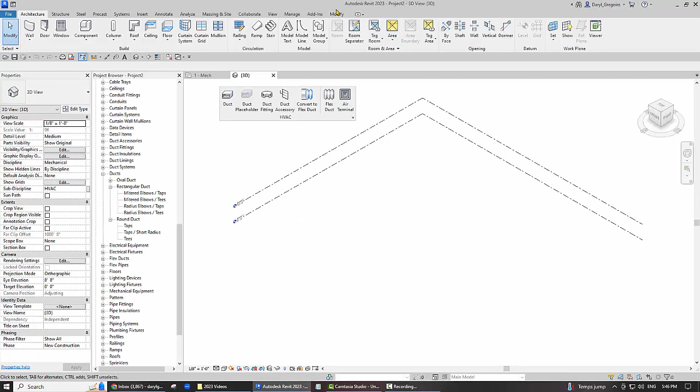I'm going to go into my 3D view, and I'm going to go up here to view, and I'm going to tile my views to split them and do a ZA for zoom all. And I'm going to draw over here. So I've pulled my HVAC palette off of my palette up here under systems. Okay, it sits up in there, so I've pulled this out.

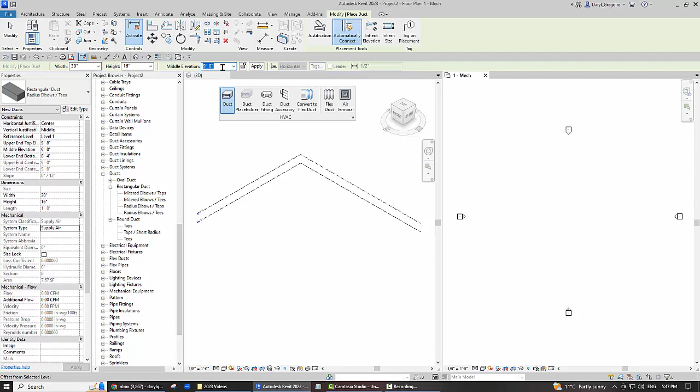So just as an example here, I'm going to start to draw some duct to have some fun, and I'm going to glance over here and take note that it's on supply air, and maybe I'm going to change the dimensions to be something like 30 by 16 or something. And then I'm going to say I'm coming off maybe a piece of equipment or something, let's say 3 feet. So I'm drawing a piece of duct here at 3 feet, zooming as I go. So off I go, and I click on there, and that color is because of the supply air.

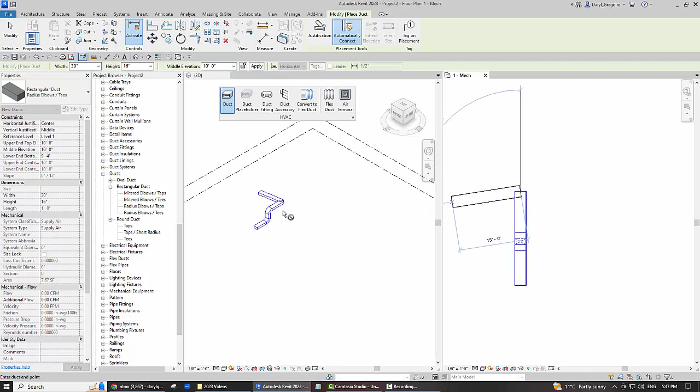And then I can switch my elevation to be 10 feet, and it's going to put my vertical riser in there with my 2 elbows. You can kind of see that over here as I draw, which is kind of neat. And then so I carry on and then turn the corner, zoom out a little bit. You can see what's going on in both windows. And I'm up at 10 feet, and then maybe I'm going to drop down to 2 feet. And then I can just type in 2 if I want, and then go to there, and then it's going to do a bit of a transition for me over here.

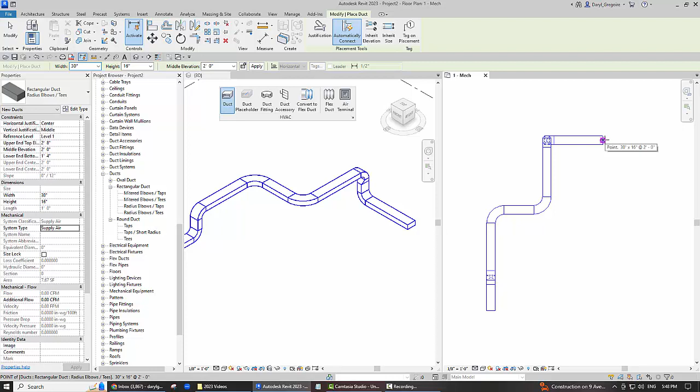Okay, and then back here I can hit escape, start again on here, and notice now it's got enough room to do these 2 full 90s, but I'm at 2 feet. So watch what happens if I only go up to, let's say 7 feet. Okay, there won't be enough room to get the 2 90s. So what it's going to do here is put in 2 45s, and then turn the corner, and then hit escape. We'll talk all about that in the future videos.

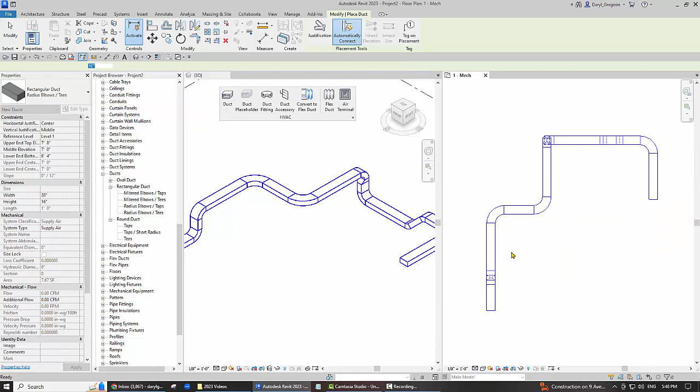So we started down in here at 3 feet, then we went up to 10, and then we went back down to 2 feet, and then we went up to only 7 feet, and Revit did all the vertical transitions, noticing the 45 over here. So I can pull rectangular duct or round duct off of this.

So I can go over to here and say duct again, and when I look in here, that was radius elbow with T's. Okay, if I want to tap, I can say radius elbow with tap. Click on there. Now I'm going to stay at the set 7-foot elevation, which is over here, and I'm going to pull that off, and that's going to put a tap in there at that same size with the radius elbow if I hit escape.

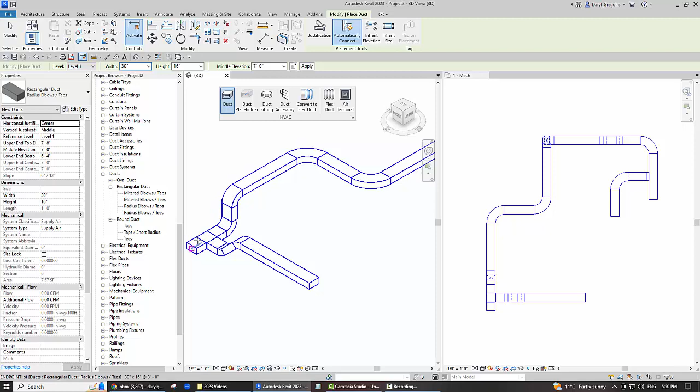Now if I want to inherit the elevation, okay, I can click on here. Okay, and if I start to draw, it's going to try to put a tap in there, and in this case it's at that same elevation, and then it couldn't, so it just put a T because this is set to be T's, and then it pulled that off of there if I hit escape. So it'll automatically do that transition for me over here because I didn't have enough room, and because this is set to be T's, it puts in the T there, which is really interesting. So I can hit escape again.

Now I can start my duct tool again, and I can pick a different size, or I can go to round. So I can go into here and say mitered elbow, round down here. So round with taps or round with T's. Well, I won't use T's because that was more round to round. So I'm going to use a tap. Okay, noting the elevation, I'm at 7 feet. And that's this guy.

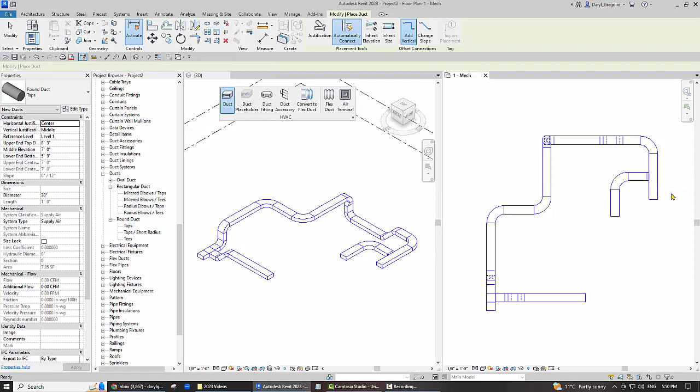So if I click on here, that's going to pull straight off. Notice it inherited the width of that other one. So let's bring that down, because the sidewall we know is 16 or so. So let's bring that down to 14. So that comes straight off of the sidewall of there with a tap. We can see that over there. Hit escape. Now remember, I'm at 7 feet right now.

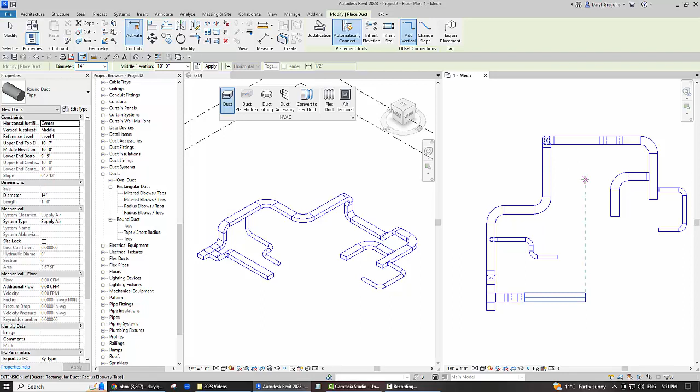So if I want to come off the bottom of this, what I can do is pick on here and then change my elevation after the fact to be 2 feet, and it'll put that little riser in there for me, right? Hit escape. Now this guy over here is down low. Watch what happens. I'll change this to be 10 feet. I can just type in 10, enter. Okay, and then if I go over to this section and pull off of here, you'll see it puts that riser in for me over there. Hit escape and escape, and that's it.

So just a quick little mini lesson on doing ductwork, a little intro, a teaser on drawing it with tees and taps and using round and rectangular, and kind of paying attention to our options bar up here.